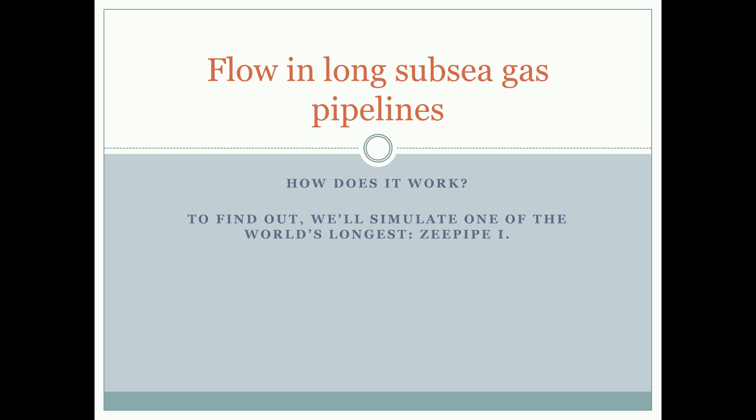It's 814 kilometers long, and it was by far the longest when it was commissioned in 1993. This is one long pipeline, one stretch. There's absolutely nothing in between Sleipner and Zeebrugge in Belgium. No valves, no platforms, no compressors, nothing.

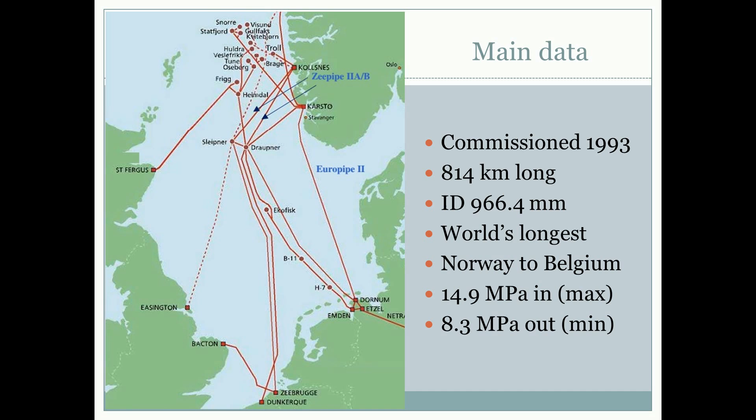The pressure can maximum be 14.9 megapascal at Sleipner. The pipeline isn't certified for higher pressure. In the receiving end, the customer has a guaranteed minimum pressure of 8.3 megapascal. So that's what has to be satisfied at all times.

Some interesting questions we will discuss: is the transport capacity the same summer and winter? And what happens to the capacity if the pipeline gets buried? Sometimes it can be wise to bury it to protect it from anchors or other things, and sometimes it gets buried unintentionally due to sand forming on top of it after a while. We will discuss the fact that it also affects the capacity of the pipeline, how much gas you can push through it.

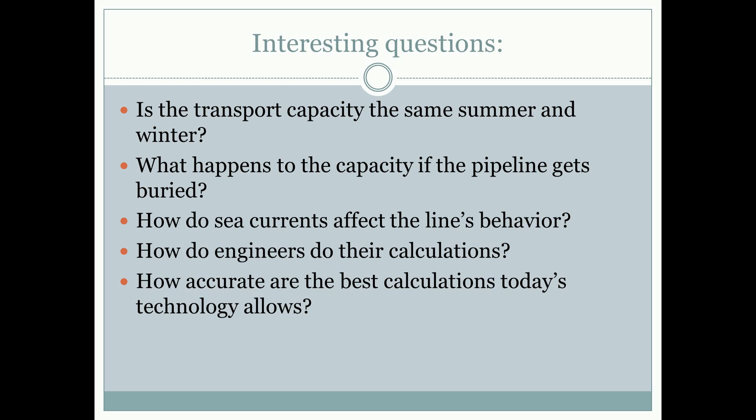Also, sea currents, they also affect the capacity. And we will look at how engineers do their calculations, or at least should do their calculations, and discuss how accurate calculations are possible with today's technology. It will probably come as a surprise to some engineers that at the design stage of a pipeline, our calculations aren't quite as accurate as we like to think.

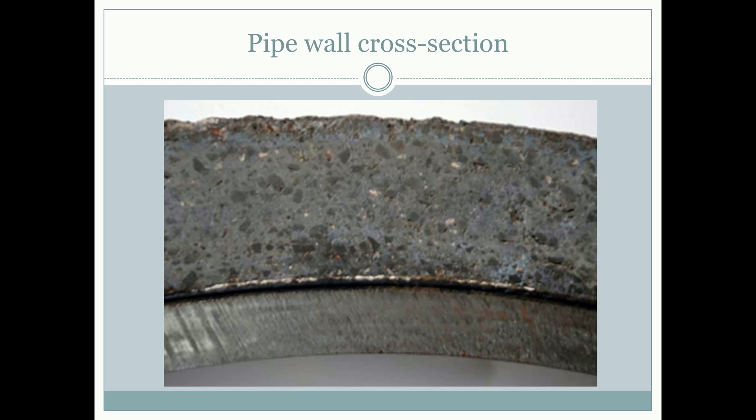We have now started a simulation program which we will use to investigate the flow in the Zeepipe line. This simulation program is called FlowlinePro. It can simulate single-phase flow where we have only gas or only a liquid, and it can also simulate multi-phase flow, for instance a mixture of oil, gas and water.

But we will use only the single-phase part of it now. And we will only use a steady state simulation. The transient simulation will be done in a second video. So let's define the case we are going to simulate this time. Let's call it the Zeepipe gas export pipeline. And we can add a subheading also if we want. We can say this is steady state.

Simulation of, and we will go for the coldest month, because the different months have different sea temperatures. And the PVT properties, we have to tell the program which PVT properties we want to use. They are things like density and viscosity and Prandtl numbers and some other parameters as a function of pressure and temperature. In this case we do it the simplest way.

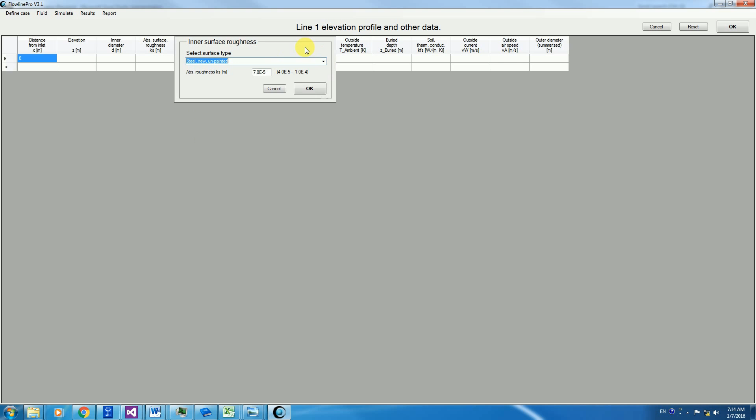The diameter is slightly less than a meter in our case. The roughness, I can go to a table and I can double click here and get some advice for roughnesses for different types of surfaces. But in our case we don't need to use this because we have actually measured the roughness.

So here we are, the roughness, and also the surface uniformity factor, which is something described in some books I will give a reference to at the end of this video. We need to tell the simulation program about each layer's properties.

For instance, the inner steel layer, we need to tell him how thick it is at the various points along the pipe. Needs to know the thermal conductivity, that's how well it conducts heat from the gas and out to the seawater. The elasticity, the elastic modulus, outside temperature, how deep it is buried, the soil properties also.

This pipeline is partly buried most of the way and fully buried in some places. The outside sea current also must be given. Outside airspeed is obviously not relevant for a pipeline which is submerged.

Now I have prepared many of these data already. A survey has been done on this pipeline where we know how deeply it is buried at various points along the line, and those data I will just paste in from the survey and into the pipeline here.

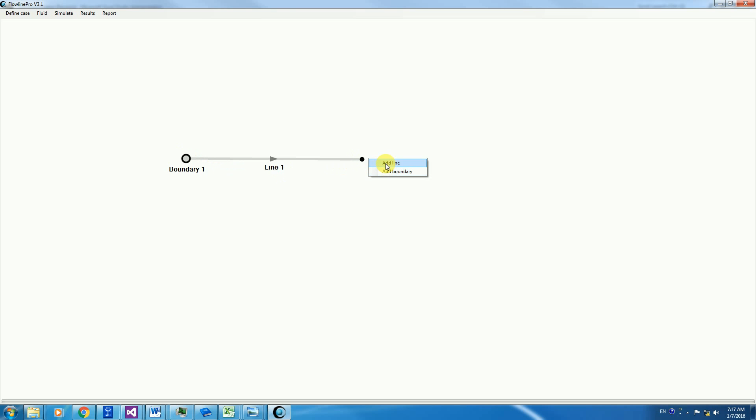So now we have specified the pipe. But we also need to tell the program what we have at the end conditions. So I right click and I add a boundary here, and I add the boundary at this end also. I double click it, and up comes a menu which allows us to tell the program what, for instance, at the inlet end I choose to specify the pressure. So I have a known pressure there,

and that pressure is 14.9 megapascal, so that's 14.9E6 Pascal, and I set the temperature to 288 Kelvin, and we can insert more pressures here. If it varies over time, we can have different points in time, but since this is steady state simulation, we do not vary anything over time. That's the definition of steady state. Everything is constant over time.

So we accept that one, and we have to do something. Hey, what is this? I inserted a line accidentally instead of a boundary. So let's insert a boundary again here, boundary 2, and then I go and specify what we have there. It's still only single phase,

and then I choose to have an external flow there, the consumer, and the type of flow I can choose between velocity, volumetric flow, and mass flow. Mass flow is most relevant because the consumers down in Belgium, they need a certain amount of kilos of gas per second in order to heat up the houses and whatever else they do. So the mass flow is the most relevant parameter. And I'm going to study a day where they use 382 kilograms per second.

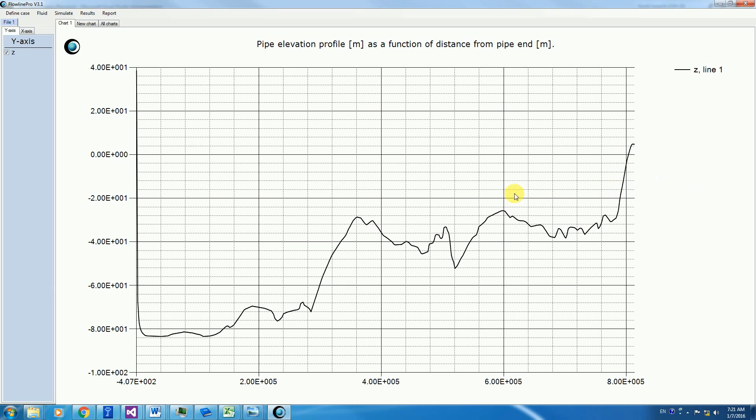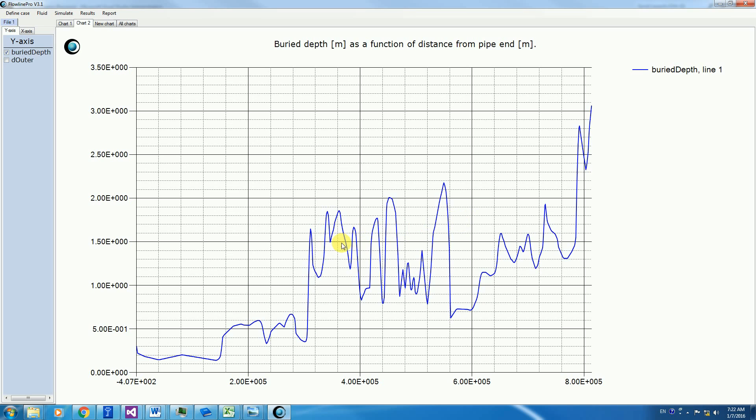But once we get closer to Belgium, it is lying lower. It has been buried somewhat by sand. And here, for instance, it's fully buried. We can also see the outer diameter. And when it's buried more than the outer diameter, then clearly it is fully buried. So here in the midsection, it's mostly fully buried. And near the outlet, it's also pretty much fully buried.

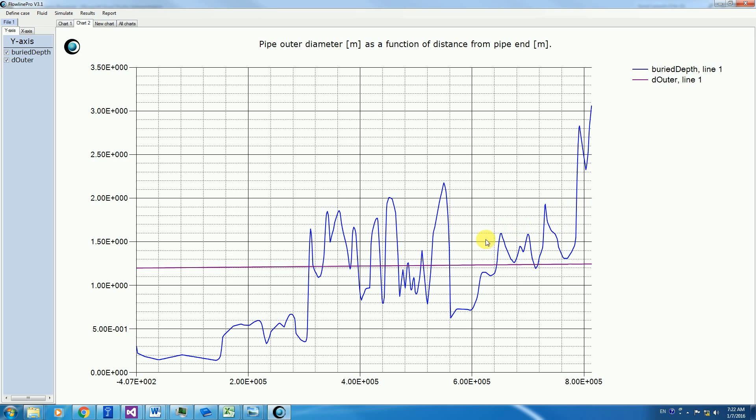The pressure along the line near the inlet was 14.9 megapascal. Then it increases a bit as the pipe goes down to the seabed. That is logical because we get the static head when we go down towards the seabed. But then friction makes the pressure fall gradually towards the outlet.

And it comes down to, let's hold the pointer over here, 8.28 megapascal is the pressure here by the outlet. So that's just above what it needs to be to satisfy the guaranteed minimum pressure at the receiving end.

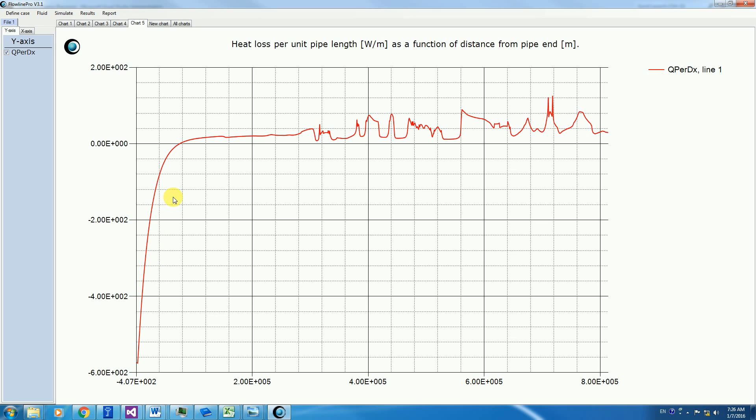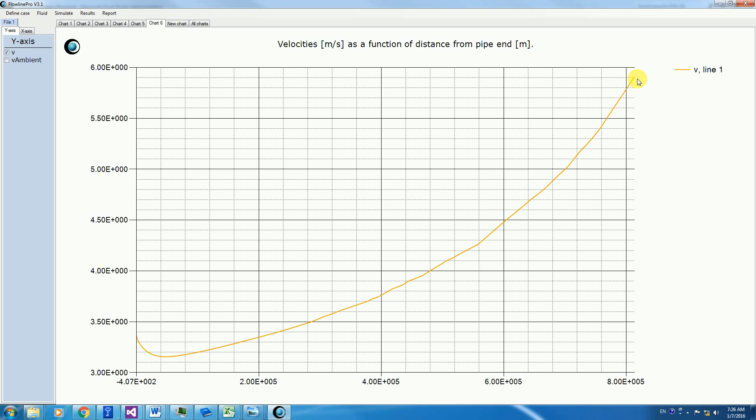We can also look at the velocity. The velocity starts out at this value, a bit more than 3 meters per second, and then it falls because the gas cools down, the density goes up, so even though the mass flow is constant, the velocity goes down because the density goes up. But then, as it expands towards the outlet, the velocity gets higher and higher because the density goes down. So the gas expands towards the outlet and the velocity goes up.

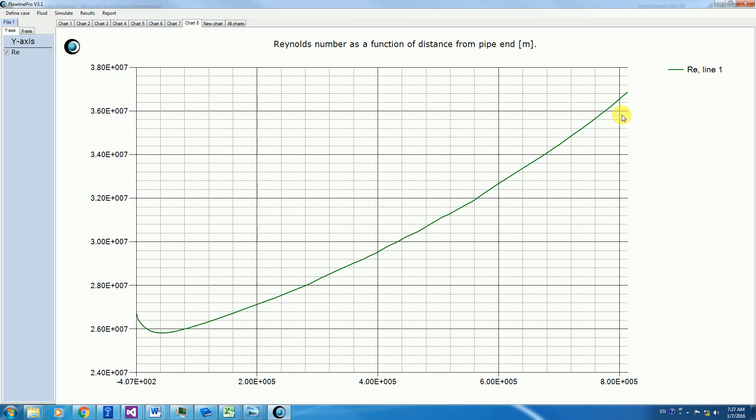The Reynolds number is quite high for a high pressure pipeline, even though we have very low velocities here. We can see that the Reynolds number is around 36 million here, which is higher than the Moody diagram covers. The traditional Moody diagram doesn't cover that. The measurements the Moody diagram is based on, the diagram most people use for calculating the friction, don't really go up to these Reynolds numbers. So we have created a new friction factor, which you can read about in the books I'll give a reference to later in this video.

So now we have an idea what happens at winter time, because we used winter sea temperatures in these simulations. It's of course interesting to know what the typical summer month would bring also. Let's go back to the original flow diagram. Here we go, and then we go into the pipe data again. I double click here, and then let's go to where the sea temperatures were given.

Here we go, T ambient, and I now paste in the temperature profile, which is typical of summer temperatures. I've copied that from an Excel sheet where I have those data, and I paste it in here. Then I say OK, and I do the simulation again. Here goes the simulation, and there it's finished.

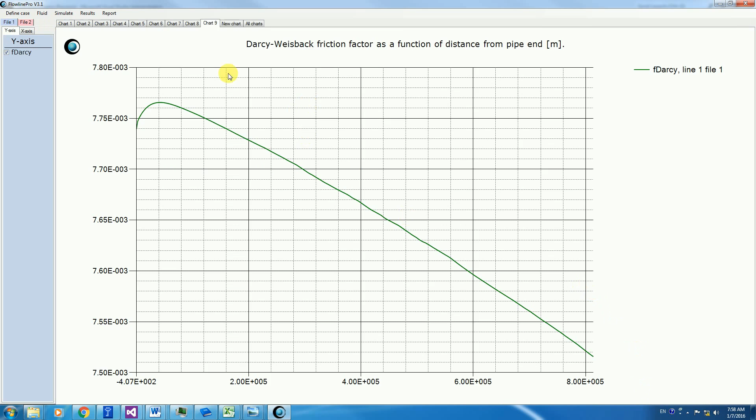The pressure we arrive at down in Belgium is now, the minimum pressure occurring here is 7.7 megapascal, whilst before, during the winter, it was 8.3 megapascal. So this shows that if we continued in this fashion, trying to push as much flow through the line as we did in the winter, we would end up with too low pressure down in Belgium.

So the sea temperature had an effect. But luckily, the effect was such that we have highest capacity in winter, and that's also when we need most gas in Belgium. That's when they have to heat the houses more because of the colder winter temperature.

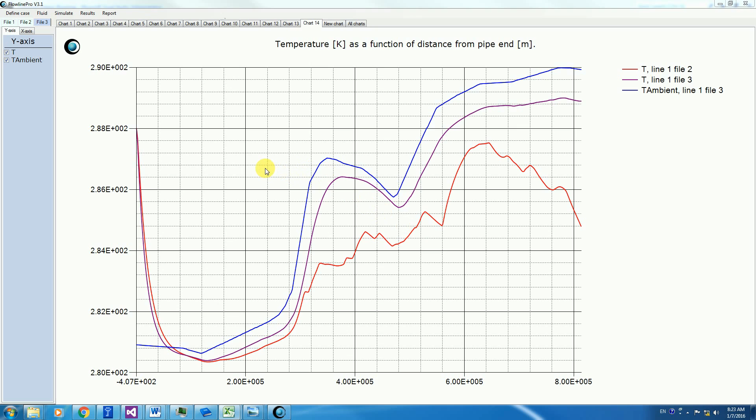It's also interesting to see what influence the surface has. We remember the internal surface roughness of the pipe is one of the input parameters. So let's reset this and go back and change the surface roughness also. This is the one, here we go, we have 2.23 10 to the power minus 6 originally.

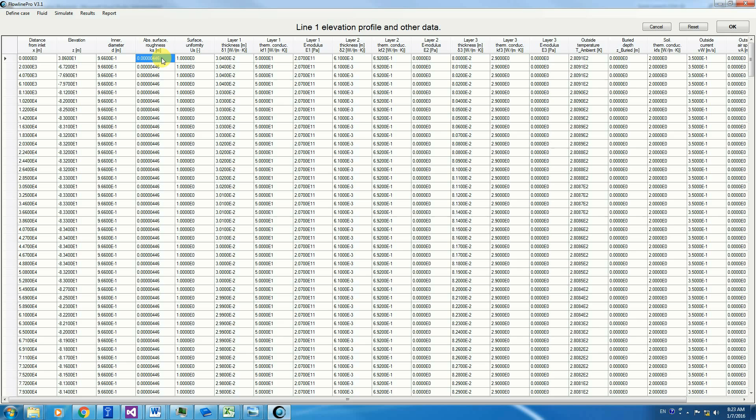Now suppose we double this, so the surface roughness is double this in the whole line. That I just paste in here. Now I have doubled it. This is still a very, very smooth surface. So it's still very smooth, but let's see what effect it has to double the very moderate unevenness which is already there. We say OK here and we simulate again.

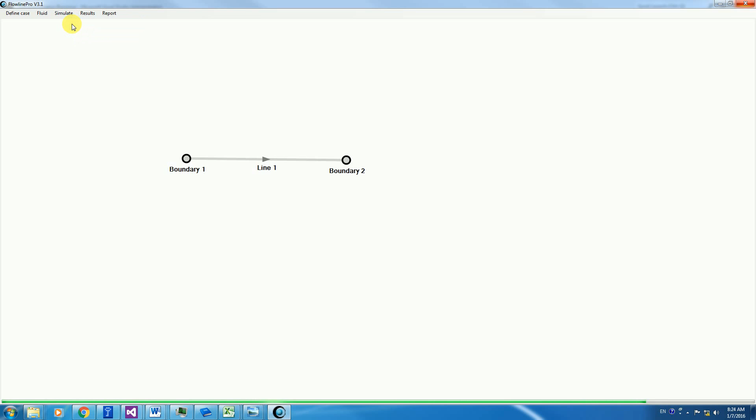New plot, and we go to the pressure. What is relevant to compare against here, I would say, is the last plot we did. It was pressure along the pipe at summer for an unburied pipe. Now let's compare that to the pressure in the last simulation, which was with a doubling of the surface roughness. And we see that has a very significant effect.

So we are talking about the pressure loss in an ultra smooth pipeline compared to one which is only slightly less smooth. It's still very smooth here. And we get a much higher pressure loss. So that's very significant. And we wouldn't be able to keep the contract in this case. Well, we already had a problem at summer temperatures for this very high mass flow that we have been focusing on in these simulations.

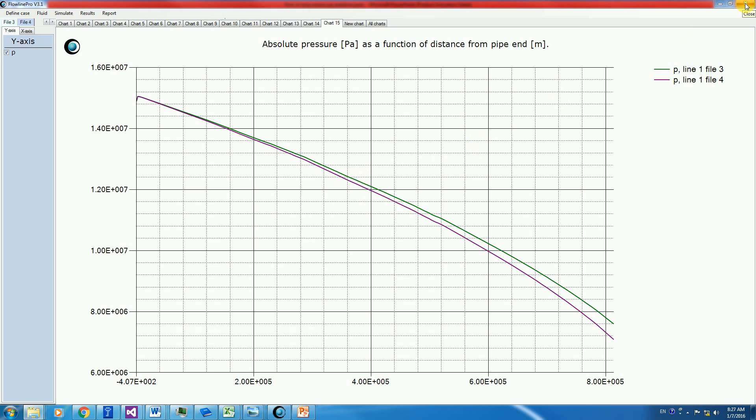It can be convenient to generate a report also and look more closely at some of the data there. But now we have so many different plots here, so we don't want to make a report of all this. I simply close the whole program at first, and then I restart it, and then I just reload the case. Remember, we saved the case, so I now reload the existing case. Here we go, and let's replot the things we have plotted already.

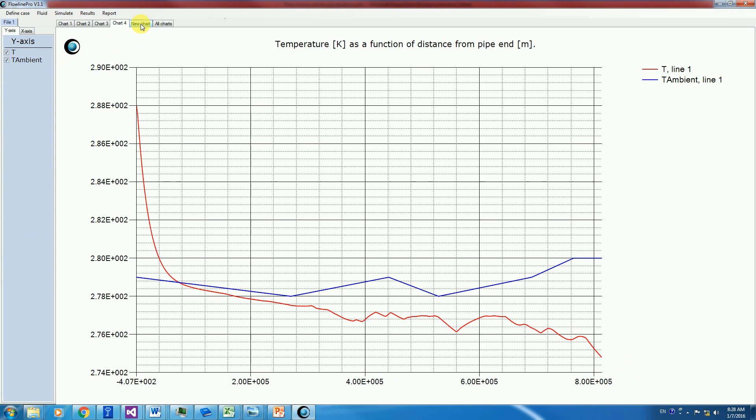We plotted the elevation profile, we plotted how deeply the pipe was buried, we plotted pressure, temperature, and also sea temperature. So now we are back to the winter month and the actually buried pipe the way it was originally. We can plot the velocity, maybe the heat loss per meter of pipe, and we plotted the Reynolds number, friction factor. We probably did not plot the diameter.

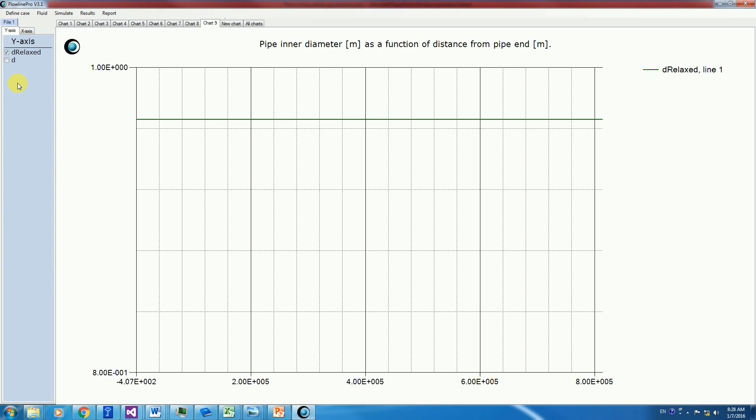Let's do that also. Here is the original pipe diameter when it isn't pressurized, but once we put pressure on it, it expands somewhat because the pipe wall is somewhat elastic. It isn't expanding a lot, but it is enough that we need to take it into account when we want to make very accurate calculations, because the increase in diameter means the friction goes down, and it also stores more fluid in there, and it has an effect on how the transient simulation behaves, which we aren't focusing on in this case, but even for friction in a steady state case, it has an effect.

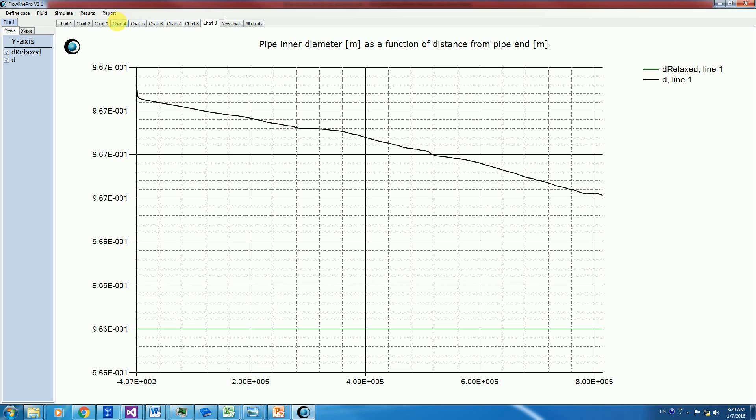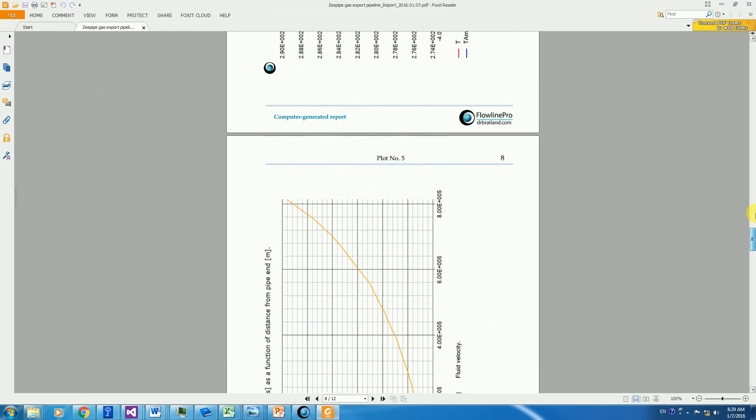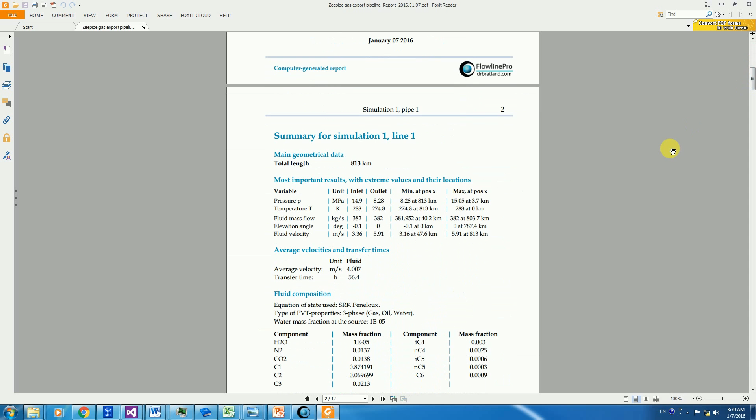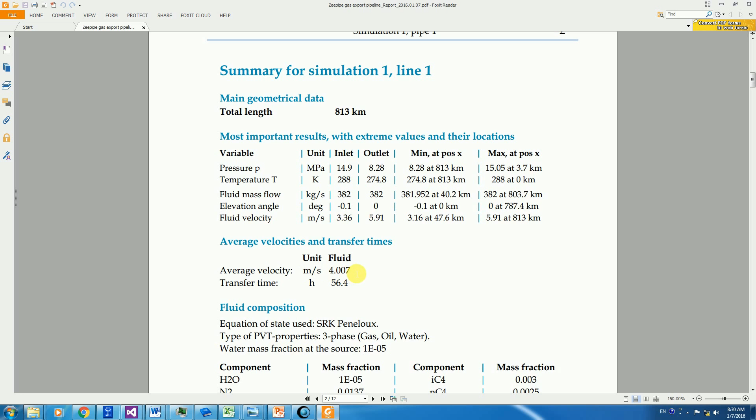We can generate a report. We make a full report in this case. And there came the report. For the Zeepipe gas export pipeline, as expected. And we see some of the data here. Make it a bit larger. The average velocity when we ran at full capacity here was 4 meters per second. That was the average gas velocity. So the transfer time of the gas, the time it takes from when it's put into the line till it comes out at the other end, is 56 hours, it says. So that's a bit more than 2 days.

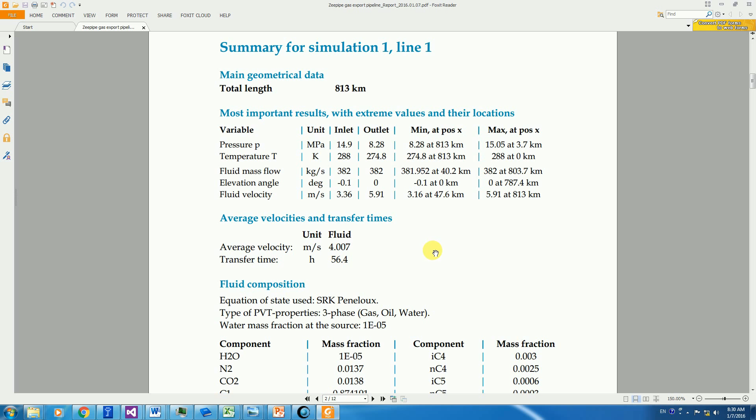The composition, what the gas consists of, is practically no water, nitrogen or CO2. The mass fractions of that are very low. But there's a lot of methane, ethane and propane, mostly methane, which is what natural gas typically consists of for the most part. And there are some slightly heavier components here, but the really heavy components have of course been taken out during the refining process, so that it's only light gas. It won't condense and become partly oil or anything like that during its journey down to Belgium.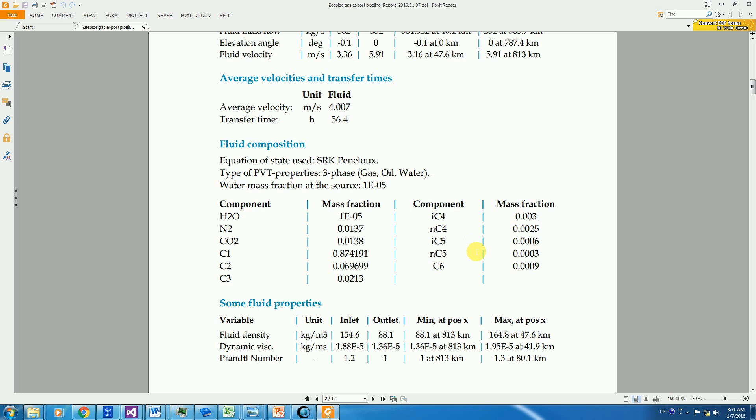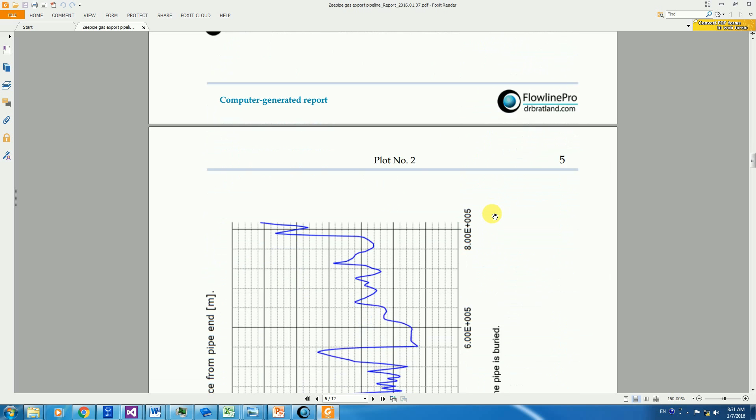And then we get the plots also in here. The plots we just chose will be in the report. And this report will be uploaded to the internet site, so it's possible to go and pick this up from there.

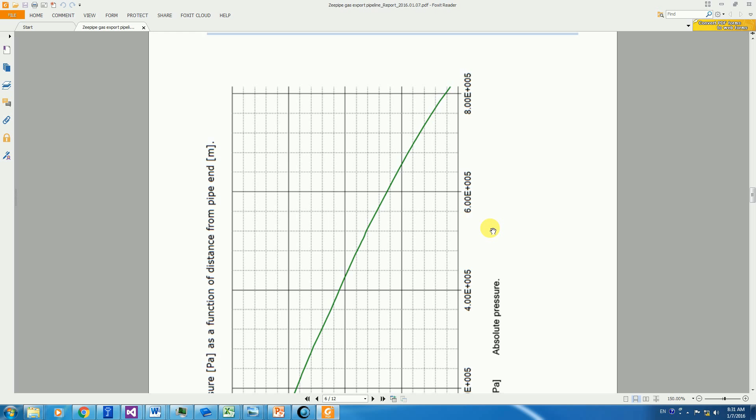Here are some of the parameters affecting a pipeline's capacity then. The most obvious one is obviously the pipe's inner diameter. A larger pipe can clearly transport more gas than a smaller one can. The pressure in the line also plays a part, because if you have higher pressure, you force the gas to take up a smaller volume, if you like. The density goes up, then the velocity goes down for the same mass flow, and that means higher capacity. So high pressure pipelines have generally higher capacity than low pressure lines.

Available pressure loss also plays a part. The higher the pressure at the inlet and the lower the pressure at the outlet, the more available pressure loss you have, and the pressure loss is what pushes the gas through the pipeline, obviously.

You simply counter the friction in there. For the most part, it's friction that matters. The inner surface of the line also plays a big part, and it makes sense to put a lot of effort into making the surface very, very smooth. There's actually a considerable difference between an extremely smooth surface and only a very smooth surface.

So extra coating or other things to make it smooth is generally a cheaper way to increase capacity than increasing the diameter. The gas composition obviously plays a role also, but export gas doesn't vary extremely much, so I put that only fifth in the importance list I have created here. Sea temperature plays a role. The colder the sea, the better.

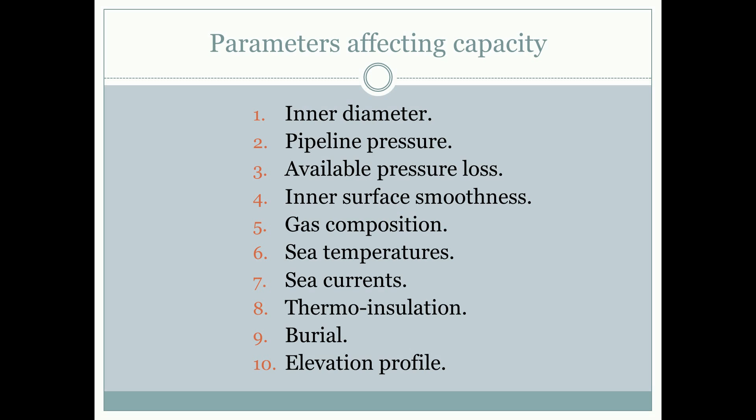And the elevation profile plays a part, but typically not a very dominant part. And we can't do much about it. We have to follow the seabed whether we like it or not.

Now here are some claims about calculation accuracies. At the design stage, by far the most important parameter affecting how accurately we can calculate the capacity is how accurately we know the friction factor at the inside of our pipeline. The tabulated data aren't very reliable, and the traditional Moody diagram isn't very good. It depends on your Reynolds numbers, because the Moody diagram is more accurate in some areas than others, and your accuracy can be as poor as up to 12% for gas pipelines.

So that's really something to be looked into if you are designing a very expensive pipeline. These can of course cost billions of dollars to create and to operate. During operation, you typically have more data and experience with what the pressure loss is in your pipeline. The instrumentation will tell you that.

But your accuracy will then depend on how well you use the data which are available, and also whether you have available reports for sea temperatures and currents. So I've said the inaccuracies can be up to 3%, but it can of course be even worse if you do not manage the data you have properly.

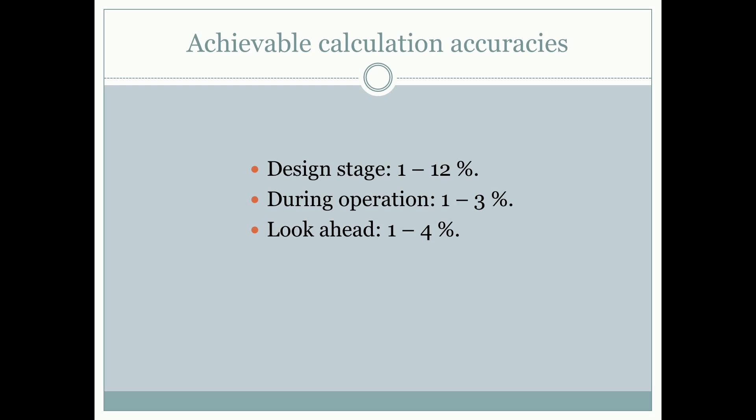The main conclusion from the simulations we have seen can maybe be summarized as follows. Best design and operational practice requires great care. There are many parameters affecting the line's capacity, some not as obvious as we would normally think of them. Intelligent use of available data is important, and of course all the calculation has to be done by simulation software. It's way too difficult to do it manually.